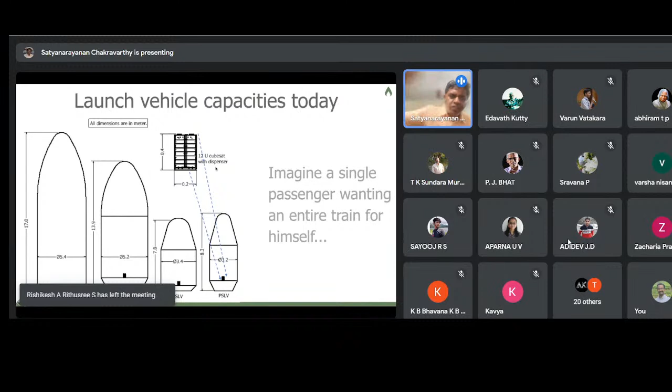So to give you an example, today a satellite could be as small as something that can fit on the palm of a person. Here we are looking at a very typical small satellite, and you have this unit called U. A U essentially is a particular cube called for a CubeSat, and it weighs a certain amount of mass. A 12U CubeSat with a dispenser is essentially the one that ejects it into orbit, and is of the order of about 0.4 meter by 0.2 meter.

That would actually sit in the typical payload fairings of current large launch vehicles like Ariane 5, Falcon 9, GSLV, or PSLV as shown here, which is very, very small when compared to the entire payload fairing, right?

So this is sort of like saying that if I am one passenger and there is one train going there, and I want the entire train to go just for me. Obviously that is not possible. Trains will run only when they run. I have to find a seat. I have to hope that a lot of other people also want to come along with me, so the train run will be profitable for everybody, which means I can go only when the train wants me to go, not whenever I want.

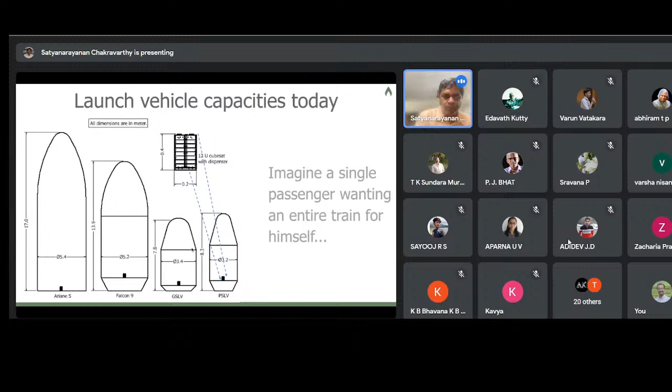It's not a taxi, right? A taxi is where I call the taxi or auto rickshaw and can actually go whenever I want. This is what it is.

So let's look at what is meant by a ride share in that case. PSLV has now launched more than 50 times. This is, I think, one example from the C-34 launch. This particular mission was carrying what's called the Cartosat 2 series satellite, which you can see sitting hugely on top near the payload fairing.

Right below that, there are a whole bunch of other satellites like the Sathyabamasat, the Swayam, Lapan-A3, M3Msat, and Dove QP-2, Dove QP-1, four numbers of each at the bottom, just above the instrumentation bay at the bottom of the payload fairing.

A typical CubeSat, as I said, can be fitted into one's palm. That's the kind of satellite miniaturization happening today. It could take as short as about 6 months to build, but you will wait for another 1.5 years, the 78 weeks I mentioned, to launch.

The reason is they are accumulating a lot of small satellites along with one major customer, and then trying to get a forced ride share -- all of you should actually go together. Now the problem with that is all of these small satellites should also make sure they don't have any electromagnetic interference problems with the main satellite, and so on.

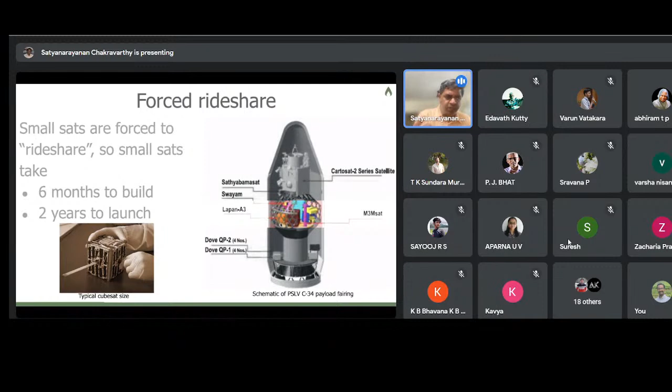So the cost of developing these satellites, and then maintaining them for the remaining 1.5 years, becomes extremely huge when compared to the cost of building and launching that alone.

Now if you look at this, is it really a big problem, or is it a big opportunity? The small satellite market is actually something like a $2 billion market in the world. By about 2025, we expect this to become like a $4 billion per year kind of thing. You can see how the projections are over the last 3-4 years, going all the way to 2025, with an uptick in the number of satellites projected.

Many times, for example at the end of 2022, we go back and check whether these numbers have actually fructified in reality, since they are past, while what is in the future is still a projection. We find that many times these projections are actually very conservative and underestimate the actual launches. So we expect that trend may continue, and these peaks could be even sharper going forward.

Most of these sectors, as you can see, the blues and the red, are primarily communication and Earth observation. Then there are a few other things. IoT is now emerging, as you can see projected in the orange one going forward.

So what do we do about this? We want to make a rocket that will be about 40 times faster to launch. Instead of waiting over 78 weeks, you'd wait not more than about 2 weeks if you're coming with a satellite. The second aspect is that the rocket is scalable between about 30 to 300 kgs of payload weight, at the same price point on a per kg basis. I'll explain that in a minute. This makes it about 10 times cheaper per vehicle, with potential for high margins or the lowest cost in the world. We expect we can launch the cheapest in the world in the small satellite segment to begin with, at the moment.

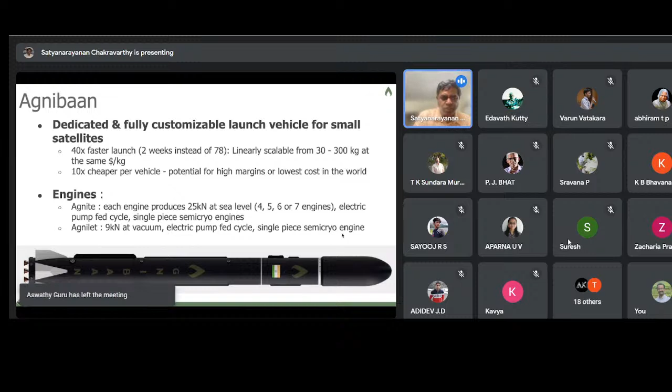So this is how the rocket looks like. The left-hand side shows only the second stage and payload fairing together. The right-hand side shows exactly the same thing, with a gap to show what's in between. Of course, it will be covered in reality. The rest on the right-hand side has been kept a bit staggered. The nozzle will actually get inside the first stage's stub, and this point will come and meet with that at the flange there.

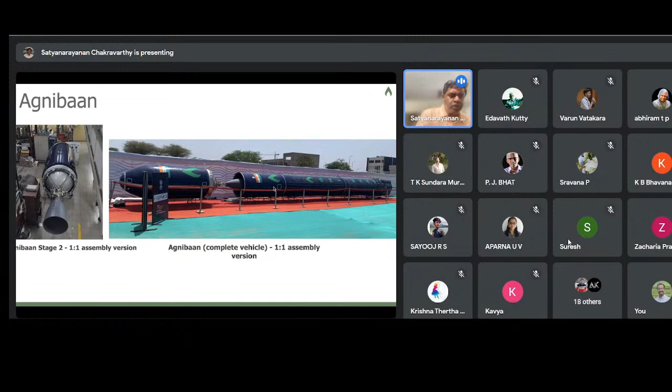The total length of the rocket, this is actually a 1:1 picture. We'll show you another picture where some human beings will be standing in front, particularly the Prime Minister of India, so you can get a sense of the size. This is typically about 18 meters tall, probably about 3 to 4 story building height, and about 15 tons total weight, for carrying up to about 100 kgs to low Earth orbit. This is the rough configuration we're talking about.

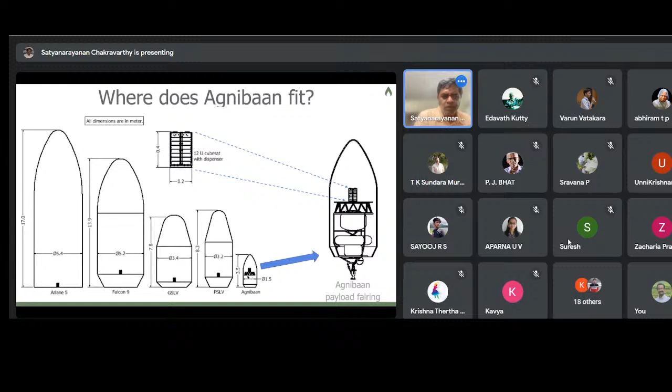It's still a very small rocket compared to the full rocket. If I compare with the previous picture of a CubeSat positioned among these large rockets currently available, this CubeSat will snugly fit into exactly this Agnibaan's payload fairing, drawn to scale with respect to the other payload fairings. On a blown up view, you can see how it occupies pretty much the whole payload fairing.

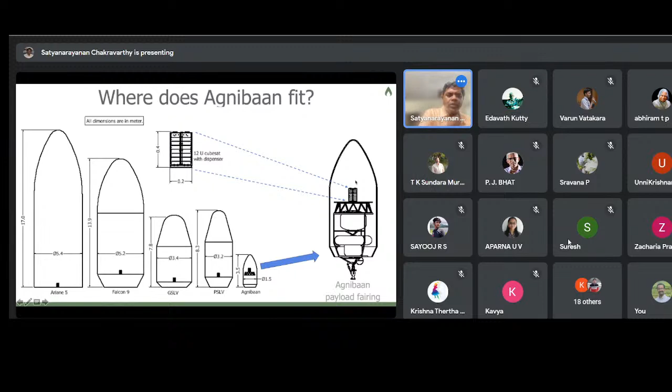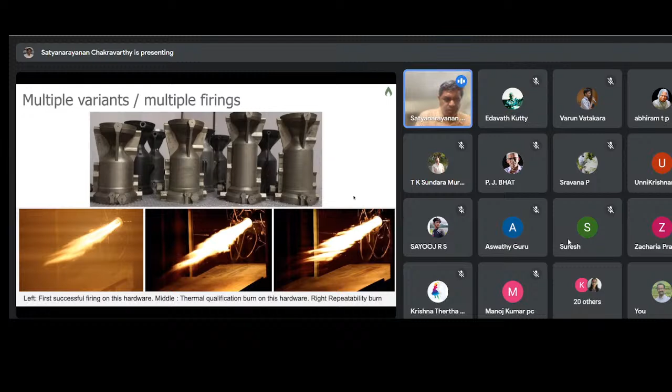So how do I actually get this particular thing about launch when you want? I can print a rocket whenever you bring the satellite, I can then start printing the rocket. Each of these rocket engines takes about three days to make, and I can make about 2 rocket engines simultaneously.

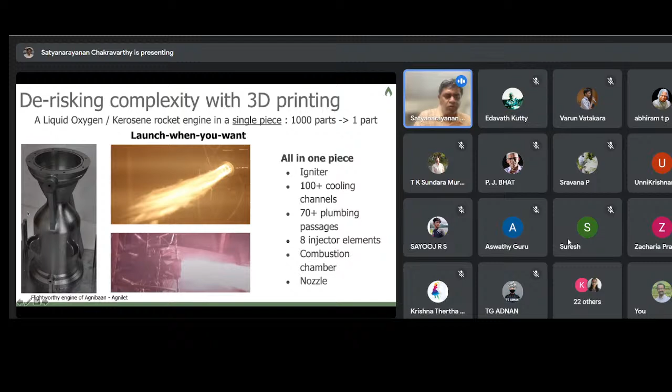I have to make about 4 of them. So I have to make these rockets over about a 12-day period, assemble them, and I'm good to launch. This is what the picture is. So I can also configure the rocket and launch what you want, instead of only when you want.

So we will do launch. We can do launch when you want. We can do launch what you want. We can do launch where you want. So these are the 3 things that we will be talking about.

So what you want is if your satellite is like about 30 kgs, right? This is about the cost. If the satellite is about, let's say, 100 kgs, this is the cost. You can see that the market value right today is actually going like this. The reason for that is whether you have a smaller satellite or a larger satellite, it doesn't matter, right? You essentially end up using the same rocket to launch. So on a per kg basis, the launch cost actually goes up for a smaller satellite compared to a larger satellite. That is the reason why there's like a hyperbolic kind of curve that is there.

Now, what we do is bring down this cost by tailoring the rocket, customizing it to suit the payload. How do we do that? We keep a bare minimum of about 4 rockets, so that they are used for gimbaling and controls. But if you want a little bit more payload, we can take a 5th one. You can put a 5th one.

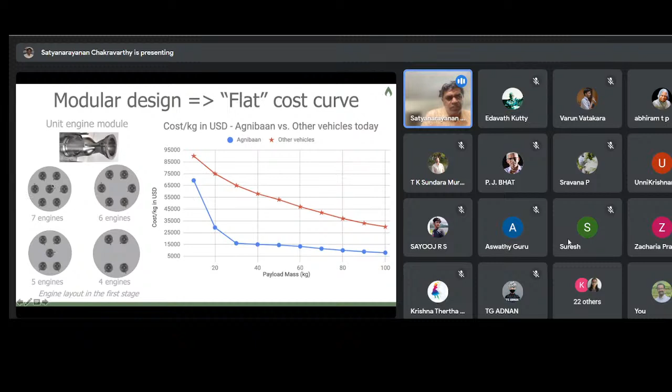If you want a little bit more payload, you can remove the center one. You can put 2 more on the sides to have 6 rockets. And this is in the first stage, right? And if you want to take a little bit more, you take all 7 rockets and so on. So this is how we actually achieve a very flat cost curve by modularizing the rocket with 3D printed engines.

Similarly, I also talked about a launch where you want, which means that the entire rocket is actually placed on a mobile launch pedestal, and you can drive this to wherever you want. And of course, it can be containerized. You can put this entire container on a ship, and then it can be shipped to some other country where it can be launched, and so on. There is no fuel or oxidizer to be taken along with this.

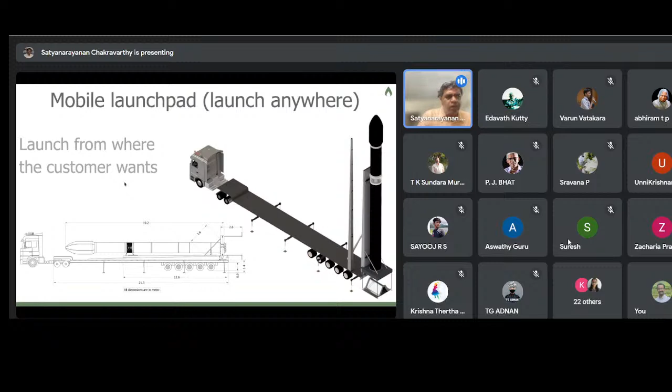So it will basically be like a piece of metal, like a car engine, let's say. Therefore, there is absolutely no hazard in transporting these things.

So on the whole, what we are talking about in the novelty of these rockets is a complete rocket engine in a single piece, 72 hours to build, no human intervention, error-free fabrication, 2 weeks to launch, cheaper insurance, hard to replicate. Plug-and-play vehicle configuration, cheaper to build, redundant architecture, customer-centric vehicle, flat cost curve per kg, hard to replicate again. And mobile, rapidly erectable launch pad.

I'll talk about it in the last slide - we now have India's first private launch pad, set up in Sriharikota exclusively for launching these Agnibaan rockets, which is very, very small - about 800 square feet or so, approximately the size of a 2-bedroom apartment. So that's very small infrastructure required. We can essentially start with a barren piece of land and move into it with containerized rockets and start launching. The last slide will have the picture of the launch pad that has to be integrated into this.

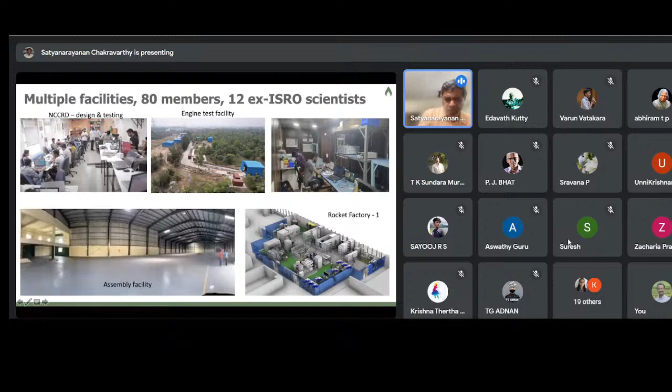So the combustion center, the NCCRD, is where we used to do the design and development. We now have test facilities here. Each of these test facilities has containers, where people sit inside and do the work, and even the mission control is basically a container. We have an assembly facility coming up in North Chennai on the way to Sriharikota, so the assembled vehicle can be taken by truck to Sriharikota. At the IIT Madras Research Park, we have something called Rocket Factory 1, where we make the 3D printed rockets.

I'm going to skip a lot of these upcoming slides because they are way too technical at a school level, but I'll be happy to answer any questions that somebody has.

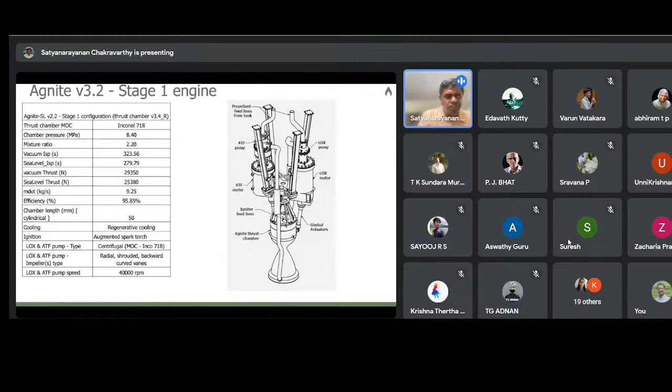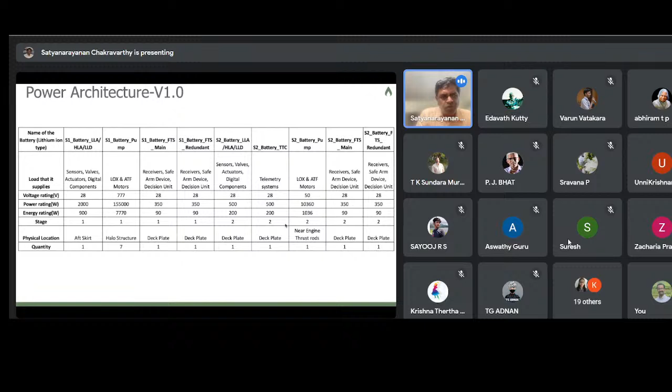Just to show you what we have, this is basically the configurations on the first stage and the second stage, and a lot of numbers associated with that - what is the stage 1 engine configuration, what is the stage 2 engine configuration, how do the structural subsystems look like, the aerodynamics of this entire thing, avionics overview, the block diagrams for what goes into the avionics packages, embedded software, the power architecture - how we're distributing the power, what's the power budget available for different aspects - and then the navigation systems, and finally the telemetry, tracking, and control communication. So that's the subsystem there.

I think with that, I'll thank you for listening, and we'll be very happy to take some questions for some time.